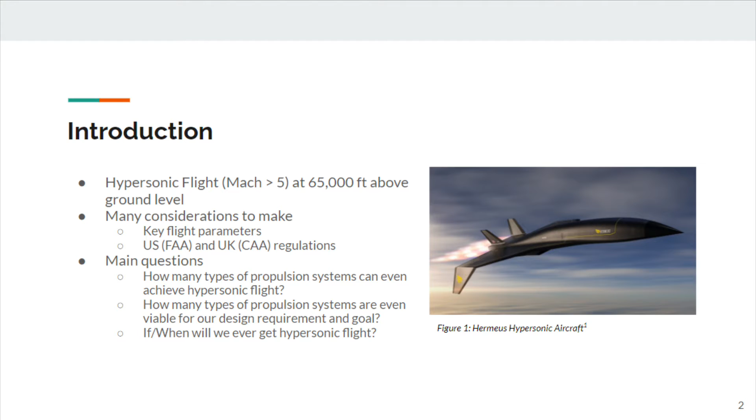Let's go over some historical examples. The X-43 was an experimental hypersonic drone that achieved a top speed of Mach 9.6. The drone was launched off a rocket that was dropped from a B-52. Once the rocket reached a speed of Mach 7, the drone detached. The X-43 was then accelerated by its single air-breathing scramjet.

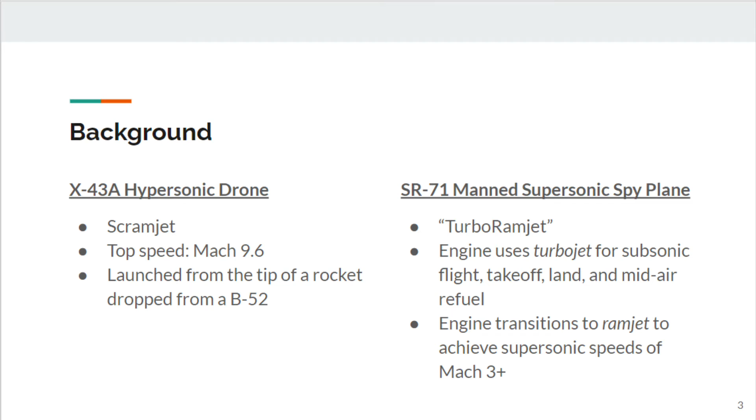Next, the SR-71 was a manned supersonic aircraft that was capable of takeoff, landing, and mid-air refueling. This was achieved by a combined turbojet-ramjet propulsion system. Below Mach 1.6, the plane's engine was ducted to act as a turbojet, but after this point, the engine would switch geometries to function as a ramjet, which allowed it to reach speeds of above Mach 3. Our propulsion system will need to combine aspects from both of these aircraft. So here's Kai Wen to talk about our system.

Thank you, Connor. Now I'll be going through the design requirements and assumptions that we set for our analysis. Firstly, our aircraft requires an operating range from subsonic speeds due to FAA regulations to Mach 5 to be considered a hypersonic system. Secondly, our team set the minimum range to be a flight from New York to London to satisfy commercial flight. Next, the target altitude at cruise is set to 25 kilometers above sea level, which is necessary to reduce drag for the hypersonic system to be in operable conditions. Lastly, the systemic requirement for the design would be to be able to support supersonic combustion.

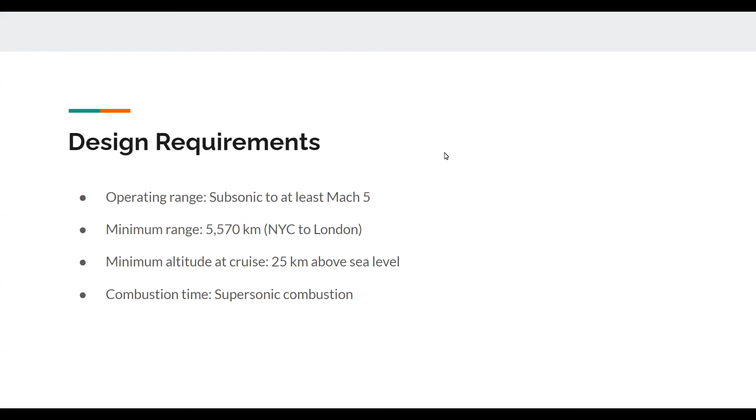We assume that there will be no fuel carrying limit in our calculations. We assume that we'll be at the target altitude for the entire range and ignore any other atmospheric conditions other than altitude in our comparisons.

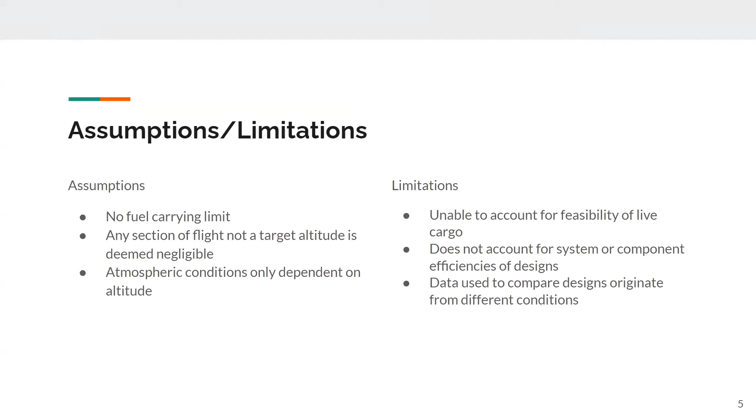The limitations of our analysis would be that we could not account for the feasibility of manned flight, since all the designs have not been tested for manned flight. Also, due to the novelty of the designs, data on component efficiencies were not available or comparable. Finally, the designs we did use to compare were obtained from different conditions, limiting the accuracy of such direct comparison. I'll now pass it on to Arpit for the approach.

We'll be looking at two systems, the hypersonic system and the subsonic to hypersonic attachment system. Within the hypersonic system, there's a large range of operating Mach numbers, and we can optimize combustion efficiency based on these flight Mach numbers. However, there's an absence of turbomachinery, which makes it unable to produce static thrust by itself. Hence, we're looking at the subsonic to hypersonic attachment systems, specifically the turbine-based combined cycle, or the TBCC.

These are combined dual-mode ramjet to turbojet systems, which allow subsonic takeoff. Within the hypersonic system, we're going to compare the dual-mode free jet combustor ramjet and the dual combustor ramjet.

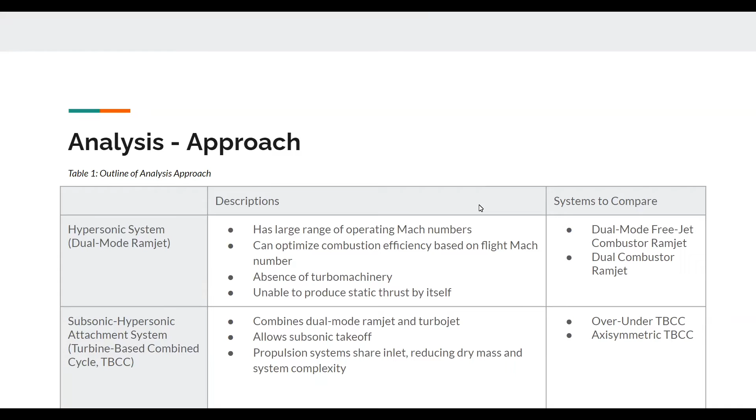And then within the turbine-based combined cycle, we're going to be specifically looking at the over-under TBCC and the axisymmetric TBCC. Now going into the analysis. Okay, I'll be going over the two dual-mode ramjet systems.

The dual-mode free jet combustor ramjet consists of one combustion chamber that can operate at both subsonic and supersonic modes. At subsonic mode, the fuel injector operates at the combustor throat, and the flame holders operate along the chamber for continuous combustion. At supersonic mode, the fuel injector operates at the inlet throat, and the flame holders are not required in the chamber due to extreme temperatures of flow that allow automatic ignition of fuel.

This single combustion chamber configuration is beneficial to reduce weight and space for more payload and fuel. Furthermore, the presence of free jet during supersonic mode negates boundary layer interactions and localized heating by shockwaves. However, technical challenges may arise due to the complexity of the design.

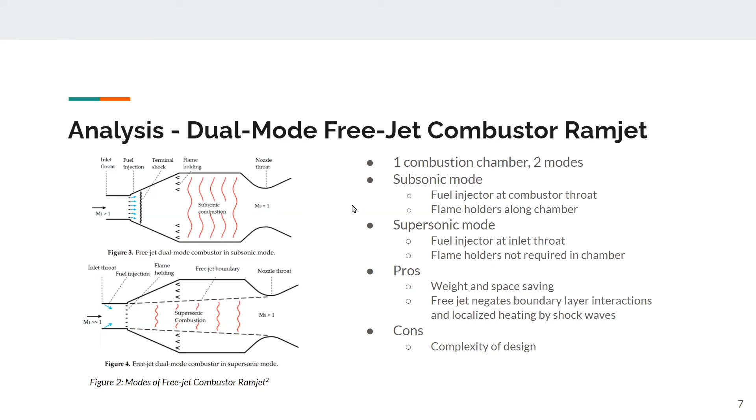The dual combustor ramjet consists of two combustion chambers, one in subsonic and the other in supersonic mode. There are separate inlets for each combustor. The subsonic combustor that is located before the supersonic combustor runs in fuel-rich condition and acts as a gas generator where fuel is partially burned.

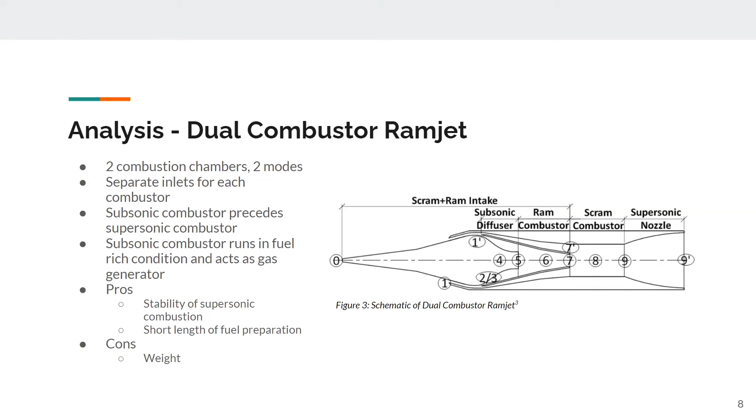This allows for heated fuel-rich mixture to be supplied to the supersonic combustor, increasing stability of the combustion. Furthermore, fuel preparation can be completed within a short length of 3 to 5 feet. The downside of the system is the weight of the split flow inlet and gas generator.

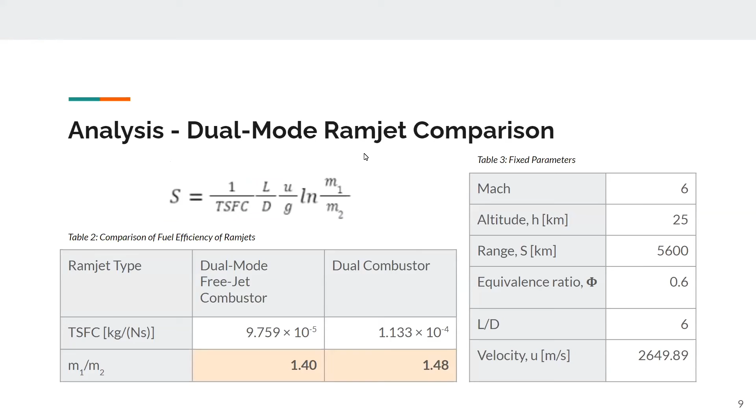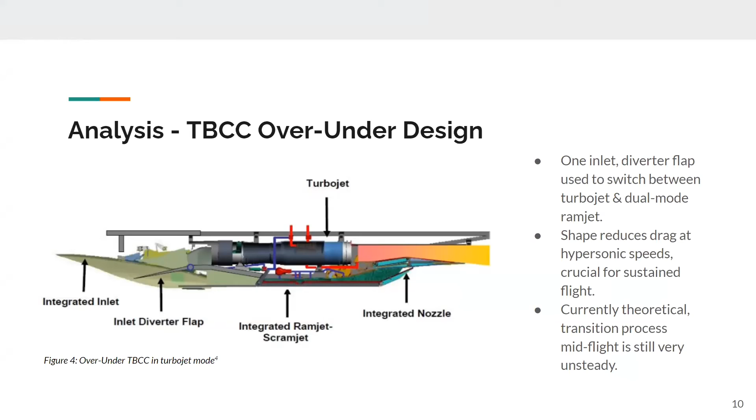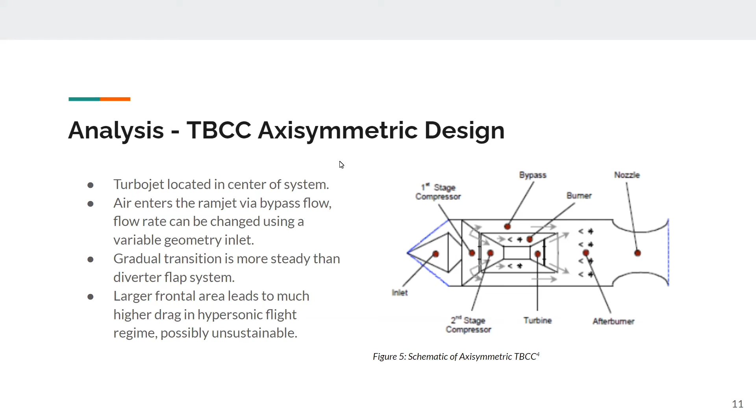The axisymmetric design has the turbojet in the center of a circular system, with the ramjet being accessed via a bypass flow. The flow rate of the bypass flow can be changed using a variable geometry inlet. Because it has a gradual transition, it's much more steady than the diverter flap system, but its larger frontal area has a much higher flat drag in hypersonic flight regimes, so it's possibly unsustainable.

Combining the analysis from Jia, May, and Winter, we have concluded that the dual-mode free jet combustor ramjet combined with the over-under turbine-based combined cycle is the most optimal. This is due to the reduced drag and the greater fuel efficiency.

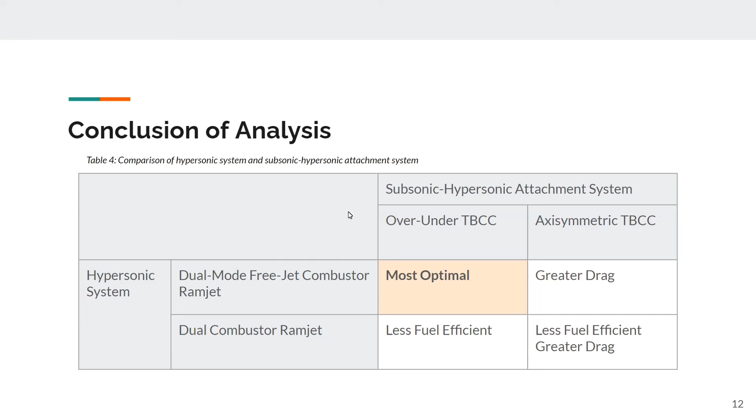As our scope and understanding of the design requirements grew, so did our knowledge of hypersonic propulsion and its limitations. The main outstanding problem is a lack of data for the comparison of each propulsion system. We simplified our analysis by directly comparing systems that might not necessarily be directly comparable.

The outlook for technology today includes structures and materials for hypersonic flight that are available but have yet to be applied. Many propulsion systems and aircraft are currently in development. To improve our design approach, we will follow a more structured design timeline that would include testing and development to provide a physical deliverable. All in all, our team did well in researching the best hypersonic propulsion system given the available technology and data.